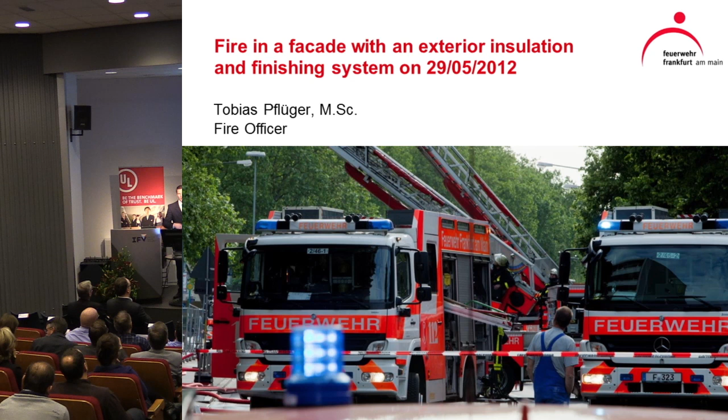My name is Tobias Pflüger. I'm a member of the fire service in Frankfurt. I started my studies 10 years ago in Magdeburg. After my studies, I started in a training program that is usual in Germany when you become a firefighter, a 2-year training program. After that, I became a firefighter in April 2012, 2 months before the incident I'm talking about today.

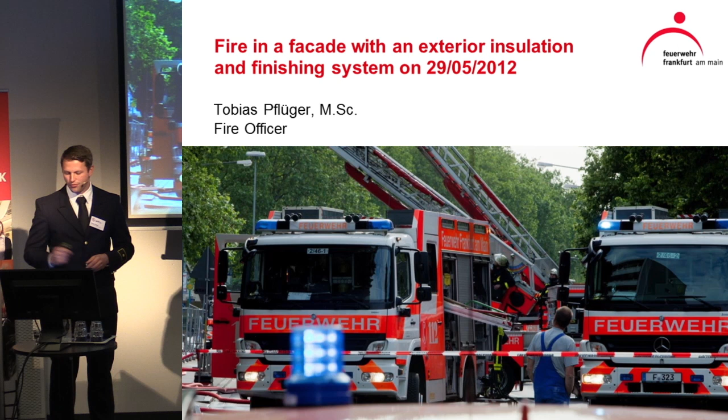My normal job is on a research project from the German government, where we discuss how fast the fire service should be on scene to rescue people. So I'm also a researcher in the fire service.

So at first I would like to give you some information about the structure of Frankfurt and the Frankfurt Fire and Rescue Service, so you have an overview of what the fire service is about. Then an overview of the incident scene and the course of operations, the prevailing conditions, and what we found out, what led us to a situation that is quite unusual for the fire service in Frankfurt, and I guess nowhere in the world. Then I would like to tell you what our next steps had been and the kind of conclusion we now have. So let's start with Frankfurt.

Frankfurt is very famous in Germany for the skyline of the city. We have a lot of skyscrapers and high-rises in the city, more than 100 high-rises above 100 meters. This is one of the most important parts of the fire prevention work in Frankfurt. And we normally have no such big incidents in these buildings.

But we also have a very big transport topic in the fire service. We have an airport, one of the biggest in Europe, and 2 of the most frequented highways in Germany, also within the city borders. Therefore, we have around 1,600 operational staff, meaning firefighters, 800 professionals and 800 volunteer firefighters. And we have 147 firefighters on duty every day, 24/7.

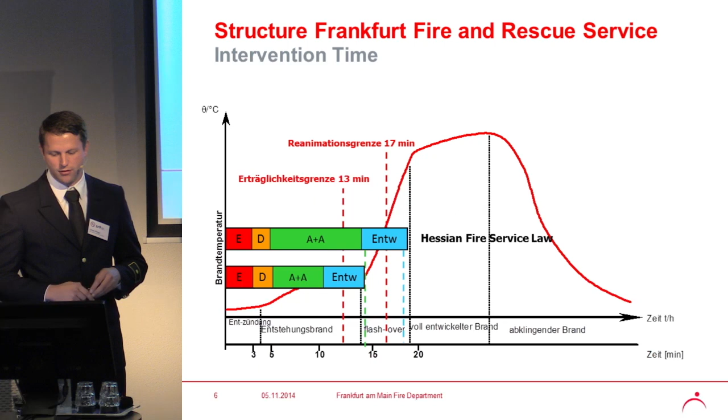This is a Frankfurt resolution. So we are one of the fastest arriving fire services in Germany, and one of the incident scenes we had to arrive at very quickly, finding out that it's not possible to deal with, is the property in the Adickes-Allee in Frankfurt. The Adickes-Allee is one of the main roads out of the city to the west of Frankfurt.

So there's a lot of traffic, especially during rush hour. It's leading also outside the city and also inside the city. The building is a 6-floor former office building, and it was renovated to become student flats.

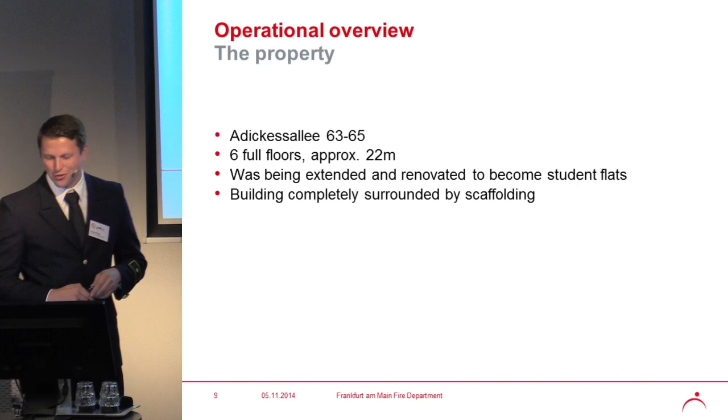We have really big problems with flats in Frankfurt, so we don't have too many of them. So a lot of bankers live in student flats, so it's a high-class student flat building. You pay 700 euros for 20 square meters. That's quite a lot in Frankfurt.

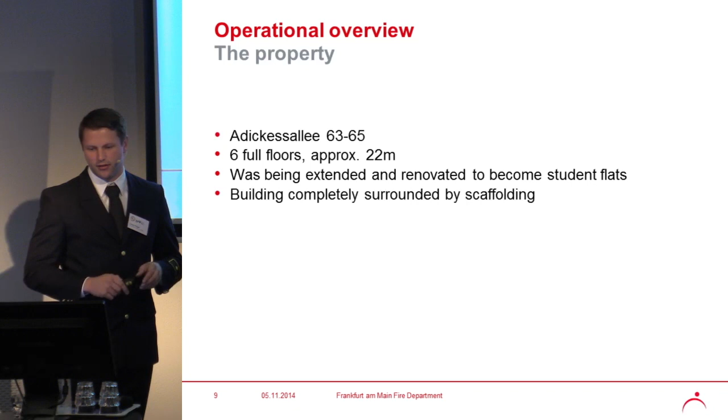And when we arrived on scene, the building was completely surrounded by scaffolding. That was a very important fact in this incident. So I will give you a short idea of where we are in Frankfurt.

Another important, positive fact about this incident is that the Hessian Broadcasting Corporation is also located 150 meters away from the incident scene. I'll tell you later why that's such an important thing for this incident.

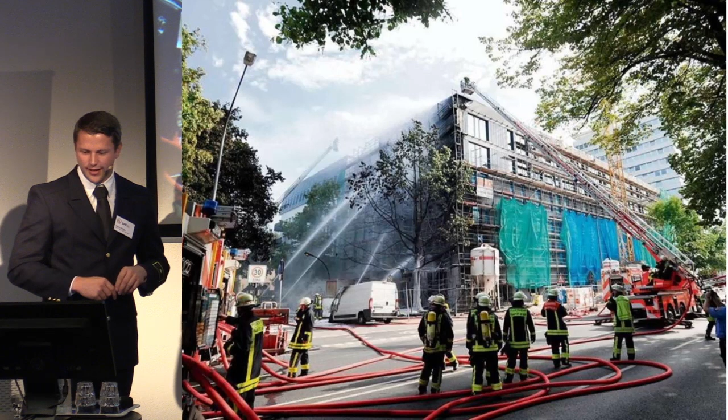So that is what it looks like on the scene. There's one sheet missing, damned.

I told you I had been 2 months in the fire service at that day. It was the end of May, one of the first really warm days of the year. I have to tell you I hadn't been there because at that time I had prepared a barbecue for some fire officers who started with me at the Frankfurt Fire Service. All of them were on my balcony having a party, and we looked to the other side of Frankfurt and enjoyed the skyline instead of enjoying a big smoke plume above the city.

The incident happened around 5 o'clock in the afternoon, and it was a really big incident by our standards, because we had 2 incident commanders of level C, 1 incident commander B, and the citywide tour commander, the A unit. Also our boss, the head of the fire department, was on scene because there was a dramatically increasing or fast fire spread in this scene. It was absolutely clear that this would lead to questions after the incident.

And we had the luck that it was 5 o'clock, so at the building site they were still working, and the site engineer was always there too, which is very important to get information about the building.

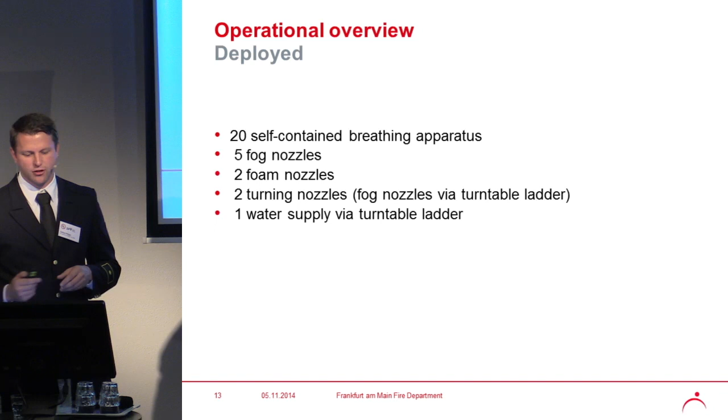So let's go to the course of operation. At 5 minutes after 5, we had the first calls in our emergency dispatch center telling us about a 5-meter high flame on a building site or construction site.

This was reported by a police officer directly across the street who had a view on the scene the whole time. After the incident, we had to talk to the engineer of the building site, who was one of the first to see the fire when it was knee-high, and then went to the back of the building to try to find a fire extinguisher.

By the time he got back, the fire had reached a height of 5 meters, so it probably started maybe 2 to 3 minutes earlier. We don't know that exactly, which is why in the presentation we only show the call that reported 5-meter high flames.

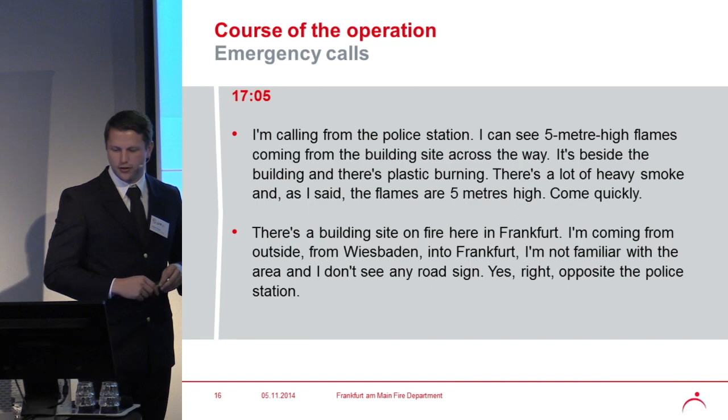That was the moment our dispatch center went crazy, because we received more than 60 emergency calls within a few minutes.

The next call came at 6 minutes after 5, also reporting heavy smoke and people running out of the scaffolding, a very dramatic scene as described on the phone to our dispatchers.

We also received a phone call from Wiesbaden, which is around 40 to 50 kilometers away from Frankfurt. They saw the smoke above Frankfurt and asked if everything was okay, because the Wiesbaden dispatch center had received a call on the emergency line and the colleagues there thought, if there's such a big fire we would have recognized it. But at that moment we still had calls coming in from Frankfurt, and not even a single fire service person was on scene yet.

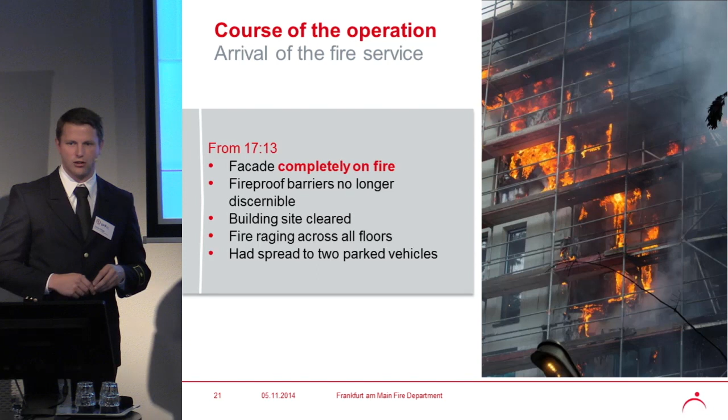This is what our fire chief in Frankfurt called - it looked like war, because all these containers had burned. You see 1 car, but there had been 2 cars completely burned.

This is the sidewalk where the fire had been. We had spalling concrete there, and really, really much heat had been produced - so much that the trees where the photographer is standing under also burned.

We were very lucky that there's a green stripe between two streets next to the building, so the next buildings were more than 20 meters away. If it were like normal in Frankfurt, with the next building directly on the other side of the street, we may have had a fire also in these buildings.

So this is approximately 17 minutes after the fire starts, in our opinion.

So 40 minutes later, we had the 'fire under control' sign, which is the signal to our dispatch center that this is a cold case. That means we don't need any more engines or additional staff.

And now we started the extinguishing work on the facade parts that we don't reach from the outside. So we worked with 3 ladders at that time to open the hard cover of the exterior finishing system and try to extinguish the rest of the polystyrene facade.

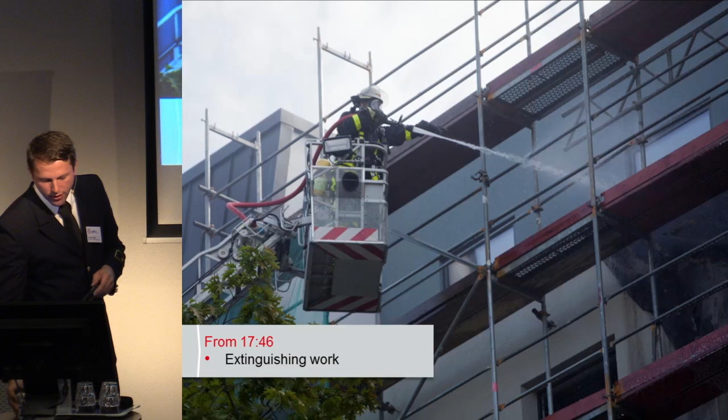What you see here is that we opened the facade on the penthouse level of this building, and you see that there is no polystyrene left. The hardcover was closed like this, but the polystyrene underneath the armoring was completely melted down.

What you see here is the glue which fixed the polystyrene facade. The melted polystyrene looks like glue, melted down to here, and we had a thick, raw oil-like mass that could have burned, but it didn't ignite because the armoring was still in function. The opening was forced by the fire service, so the polystyrene couldn't ignite.

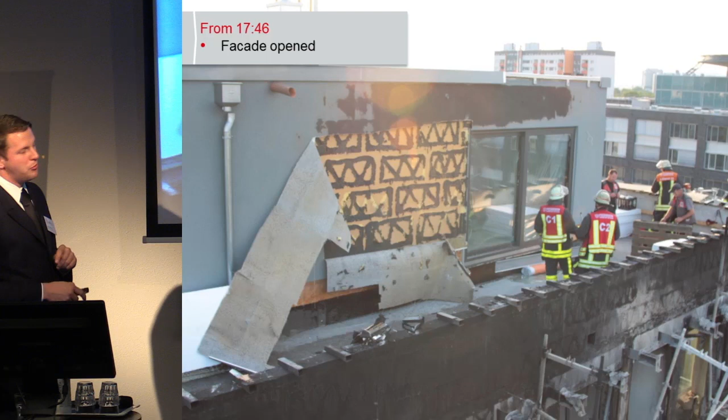What you also see is what was really a good point at this time of the building site - they had prepared for balconies on the front of the building. So when the scaffolding started to move downwards, it hung up on these beams, so the scaffold didn't fall on the street onto our firefighters.

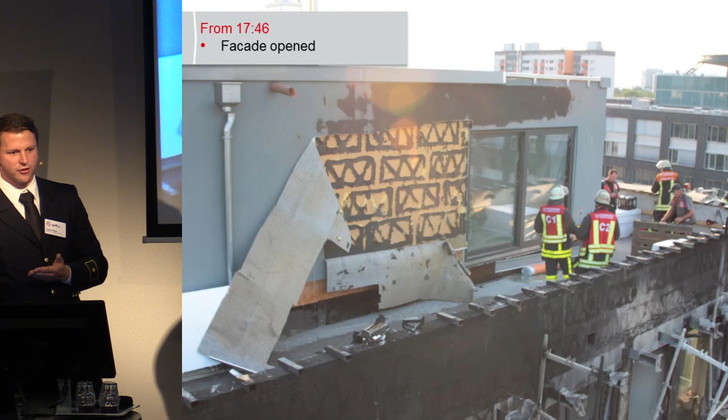You will see some pictures. I guess it's the next one. No.

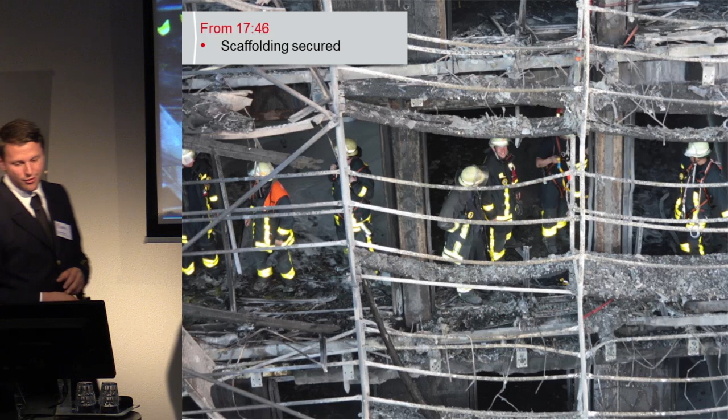This is scaffolding. It looked very unstable, and we had to secure it. This was also a task which took us quite a long time, I have to say.

At 6 minutes after 8 o'clock, 3 hours after the fire started, we had the fire extinguished sign, which means everyone can go home. So not too much time at this point.

What I would like to tell you about this incident is that the building was still in a construction period, and only this part of the facade to the side street had been really completed. Other parts hadn't been completely finished. So you can see here the gray mass. This is the polystyrene facade, and only in the upper parts there's the hardcover or the armoring.

What we also have to say now, or what we found out, is that much of the burning polystyrene in front of the building was from stored polystyrene in front of the building. So it's not only the polystyrene which melted down the wall, it's also polystyrene which was in front of the building.

We had been very lucky because the building wasn't in use yet. The rooms had been completely empty. They planned to start the interior work the next week, the week after the incident, and there was nothing that could burn in the rooms of this flat building.

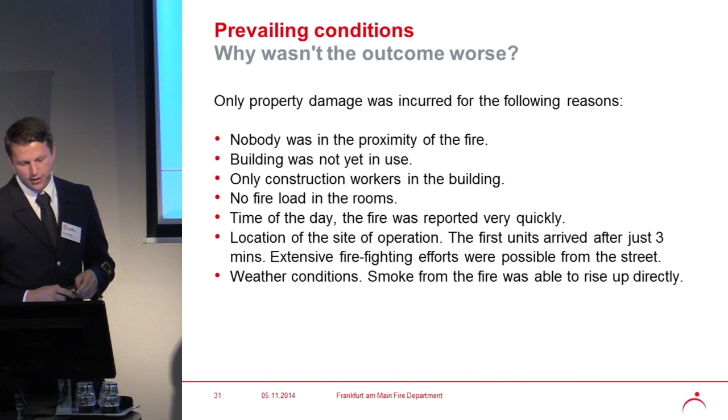We had quite good weather conditions. I told you about the beginning of summer, and the smoke could just rise up. So we didn't have a problem that other buildings had to be evacuated, or other work caused by smoke damage for us. So what we found out...

In Germany, we have a lot of buildings that are insulated with polystyrene. It's the most common building material used, and we have thicknesses from 10 centimeters to 40 centimeters. It's normal standard, more above 30 centimeters right now.

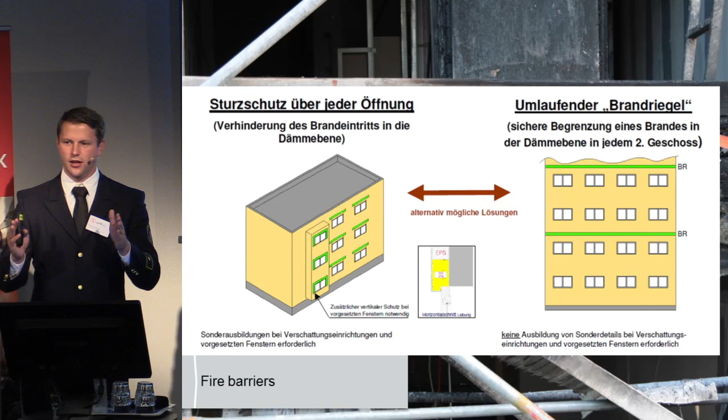It's also allowed to put the fire barrier above every window, but on a construction site, you never see this option. You always find this style, because it's much easier to do on the construction site. So at this time, we had the non-flammable fire barrier, which had a height of 10 centimeters. In this building, we had 32 centimeter thick polystyrene and a 10 centimeter high fire barrier. And that is what the fire barrier looks like after the fire.

The manufacturers told us that we pulled down the fire barrier after the fire was extinguished, but an engineer found out that it was thrown away by the falling EIFS ring, which means that the ring was burning above the fire barrier and also under the fire barrier. That is what an engineer found out.

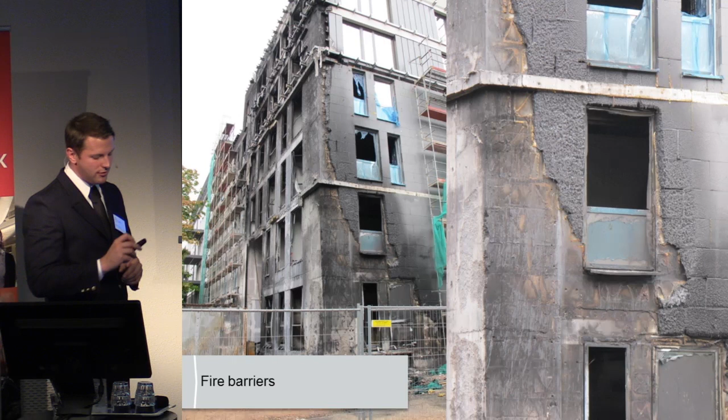What you can also see is that on this side, the armoring, or the facade, was completed. The full armoring was on top of the polystyrene, and the fire barrier had been finished, as you see here. This part of the work was done. On the side of the Adickes-Allee, the lower parts of the building hadn't been finished. They didn't have the armoring.

What you see here is like an inverse fire, where the material melted more in the lower parts than in the upper parts. That's completely different than you'd expect in a normal fire. You'd expect more like this form. But we think it's a problem of the ground fire that was also in this area, and the wind came from this direction and blew away the smoke from the building. That's our opinion why this happened in this incident, not like you expected.

But you see another point: the unfinished, not-armored insulation system didn't burn the complete height, but the finished system burned over the whole building height. So there must be a problem when the armoring is on the polystyrene.

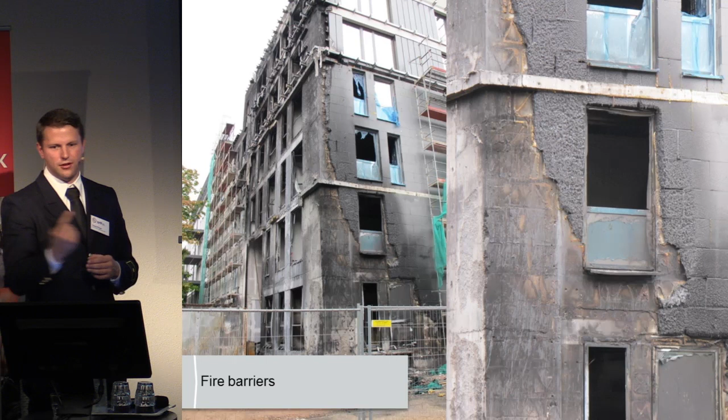When you build a fire with a wood piece, you dig a hole into it so that the fire can heat all the surrounding material. This is what happened here. The hard cover and the armoring was on one side, the fire was in between, it melted the polystyrene, and the melting polystyrene attached to the armoring and also to the wall. So it had a kind of chimney effect, forcing the fire more to the upper parts. This is what we saw on the incident scene.

You mean that the facade fell down unburned, and you found remains on the street, or did it burn well? Remains of the polystyrene, or the parts? The question is if we found remains of the facade on the street.

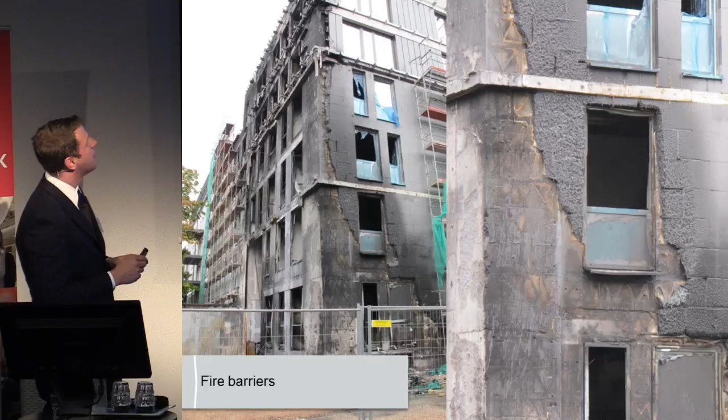We found it not on the street but on the scaffolding, because it's an uncombustible, mineral material, and also a plastic wrap which is attached to the polystyrene surface, so that the parts could attach to the polystyrene. What we also know, though you can't see it well in this picture, is that when you go closer you see that the fire barrier was glued to the wall, and this glue wasn't heat resistant.

Yeah, it's not necessary. Okay.

From the fire service point of view, we recognized that there may be new incidents we can't handle. We saw on the incident scene that we couldn't handle the fire, and afterward we got the whole timeline, which is very uncommon for a fire. I guess also in the Netherlands you have a reporting timeline from the moment of ignition to the first arrival of the engine. We knew it was a very short period of time. We found that even a very powerful fire service like Frankfurt's, with 150 firefighters on duty 24/7, which is quite a lot in Germany, couldn't handle this fire. We didn't have time to react because the fire spread at such an enormous speed that we couldn't deal with the problem.

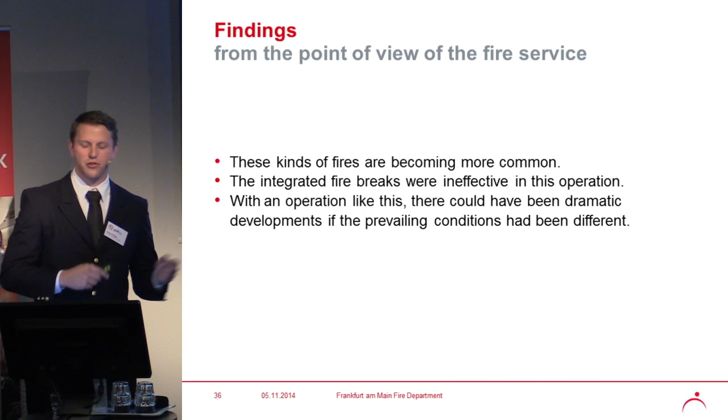So what is the first thing you would do? I guess you ask other fire services if they had the problem before. We did the same in our next steps. We asked every relevant fire service organization, volunteer fire services, professional fire services, and plant fire service organizations, if they had incidents relating to polystyrene facade systems, and what their opinion was about that.

We asked them to send us every incident with a report and pictures, and we collected them, because we had also had discussions with the manufacturers. They told us it isn't a problem of the system. The system is tested, it's evaluated, and it's certificated. So that couldn't be a problem of the manufacturers or the system.

Then we also had discussions with politicians. In Germany, the goal of reducing carbon dioxide and energy saving rules are a very high goal of the German political parties, of every one of them. So it's very uncommon to tell them that there might be problems by insulating houses.

Even the most common system in Germany, where we have millions of square meters installed in buildings each year, seems to have problems. So we discussed the problem also with technical bodies, such as the German Institute for Building Technologies, which is responsible for certifying and preparing the testing of building materials and systems.

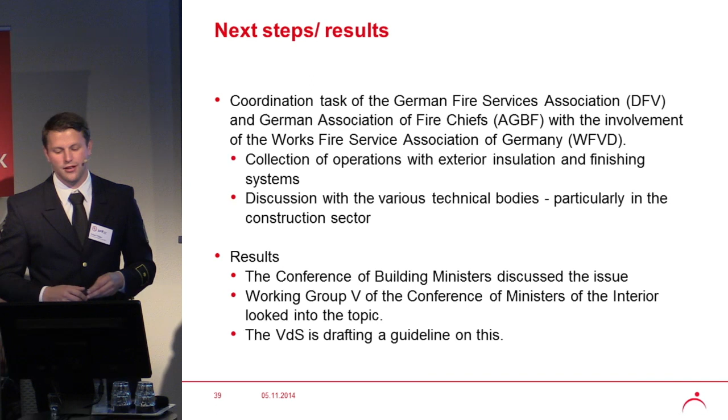And also there are technical problems on the construction side. At this point we discussed with the building minister conference and shared all the information with them. And I forgot one fact: at this point of the discussion, we as fire service in Frankfurt hadn't been involved anymore in the process, because the leading fire service responsible for fire prevention in this case is, up to now, Munich. We gave all our information to the officer in Munich, and he transported it into the building minister conference and other working groups in the political area. So we hadn't been involved anymore, but we are still kind of experts, because we had seen a dramatic incident, so they wouldn't let us go without our knowledge.

They contacted us. The question is whether the distributors or manufacturers of the systems contacted us, or we contacted them. They contacted us first, because the day after the incident there was a big news magazine segment on television, and there was one sentence my boss said. It was very rough, I don't know how to explain it, but very rough against the industry. And then they sent us lawyers and letters saying we should be more quiet, because it's their tested, certificated systems and all that stuff. So it was very good that the fire service in Munich took over the next part, dealing with the political parties and relevant organizations and such.

In March 2013, nearly one year after this incident, the Hessian Minister for Economics, Transport and Regional Development—it's now another department with another name, it's changing really often—this minister is responsible for building technologies in Hessen, the state of Hessen. He was at that time the chairman of the German Building Minister Conference, and he gave the first press release where political parties accepted that there is an issue or a problem with polystyrene facades. As you can see here, I hope it's also in this text, there should be a working group again to discuss this problem and find out what the real issue is.

One of the most important points is that rubbish containers might also be a problem. I told you that all the time, when the systems were tested years ago to get their certification, they always thought about a fire starting inside the building and spreading, with flames coming out of the window and igniting the facade. But in our case, the fire started in front of the building, and in our collection of 100 incidents, we had many cases with a fire starting in front of the building. Especially the heavy incidents had started outside of the building.

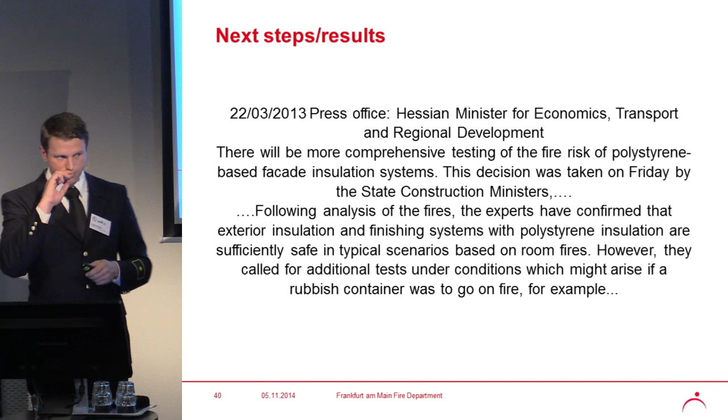The building was surrounded with workers' platforms, covered for wind and rain with plastic covers. Had this material influenced the fire? The question is whether plastic materials that protect scaffolding from rain and wind were involved in the fire. Yes, they were involved, but we don't know how dramatically. But we had other incidents where the building wasn't scaffolded and had still been in use for some years. So other buildings had the problem even when they weren't scaffolded.

The speed of spreading the fire could be influenced. That's true. This was a real incident, not a scientific research project.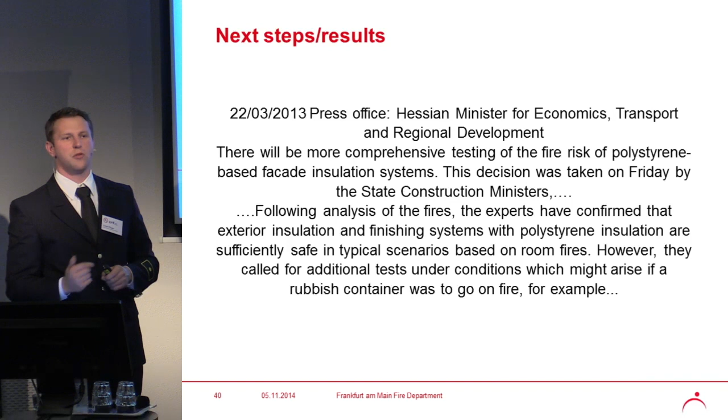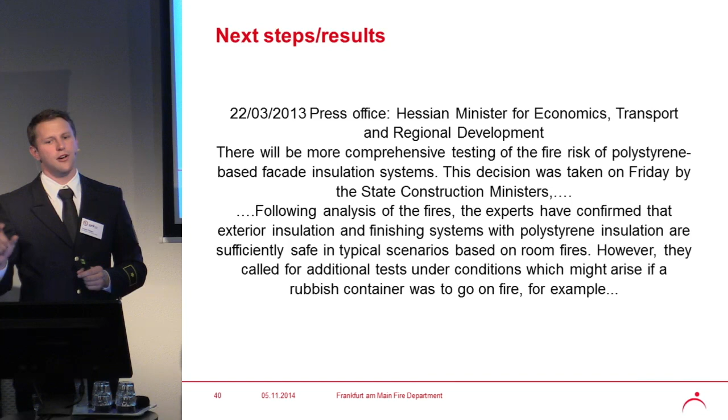The producers told us at the beginning that one of the reasons for the enormous fire spread was the scaffolding, and that the wooden beam on the ground of the scaffolding also caused the fire. But on our pictures we saw that all of the wooden beams had still been in function. We had pictures where the workers who deconstructed this melted scaffolding walked on them, so they couldn't have burned too much. They still have a thickness where they can bear a person. So the fire was so fast that the beam wasn't burned down too much.

We don't know it, I have to be honest, but we had other cases where no scaffolding had been involved, and there was also enormously fast fire spread.

So now we invent a working group, supported by an expert group. Every responsible party of the producing and building side, the fire service, and the regulation organizations had been involved in this working group and also in the expert group.

They first had to define the test conditions. What is the problem? Now we have again the rubbish bin. It was clear that the new test will have a fire which starts in front of a building. And we found out that the problem is a big fuel load in front of the building. In our case, it had been stored polystyrene in front of the building.

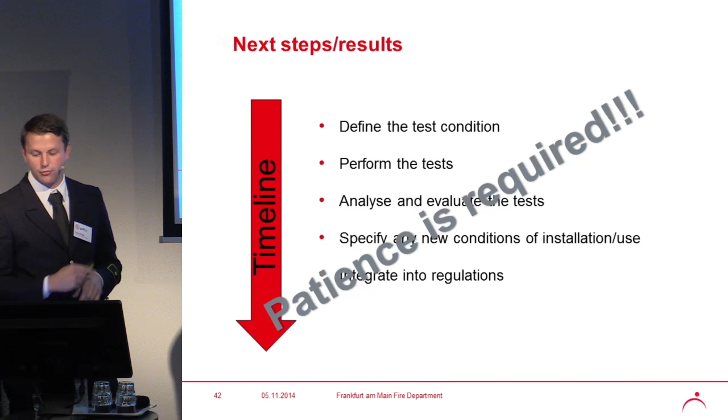Three of the tests had been performed. And the analysis and evaluation of this test had also... one second, I have a new sheet. So this is what the actual status is today.

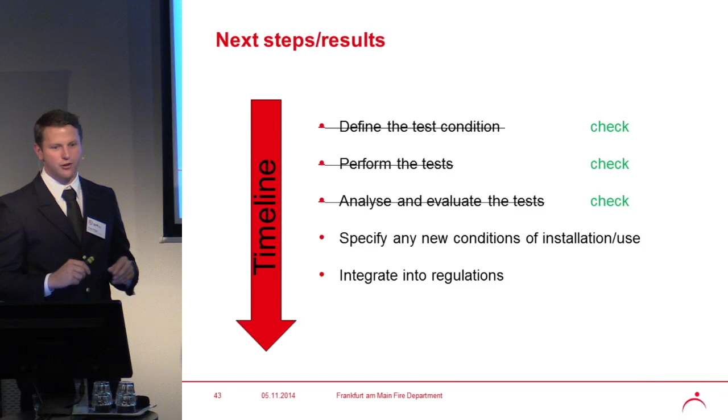And what I'm also very proud to tell you is that this week we will have a press release from the German Institute for Building Technology, which will say that there are new ideas for how the polystyrene system should attach to walls. So we now have a conclusion in this process.

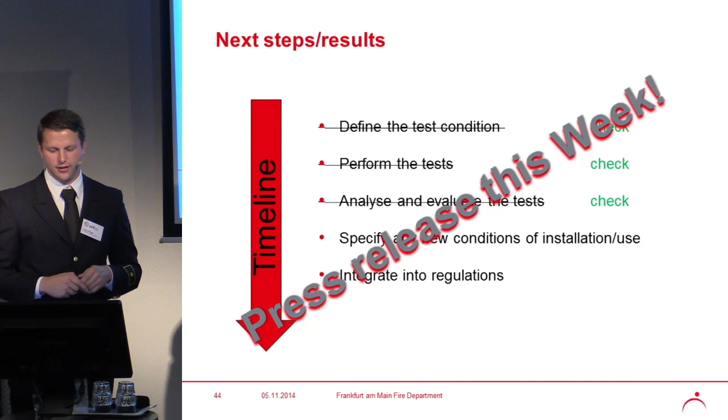I can't show you this press release because it's announced somewhere this week. I hope that it will be today or yesterday, but in the break I had a look at the website of the institute and they hadn't released it yet. So I can tell you what other nations are doing right now. Maybe it's also an idea for Germany.

In Switzerland and Austria, they have these fire barriers after every floor, so every floor is a fire compartment on its own. There's also a fire barrier at the very lowest part of the system, also 10 centimeters. The lowest part depends on how the building or the insulation system is built, so it's just the lowest part. The insulation system has to start with a non-flammable material in Austria. So if the fire is starting in the basement and basement windows are broken, then the flames come underneath to the lowest part of the system, and this fire barrier should stop these flames.

There's also, in other nations, a discussion about how to attach these fire barriers. Everywhere it's now allowed to glue this system, but there may be other connection systems available that are more heat resistant. But there's a very serious issue with the thermal behavior.

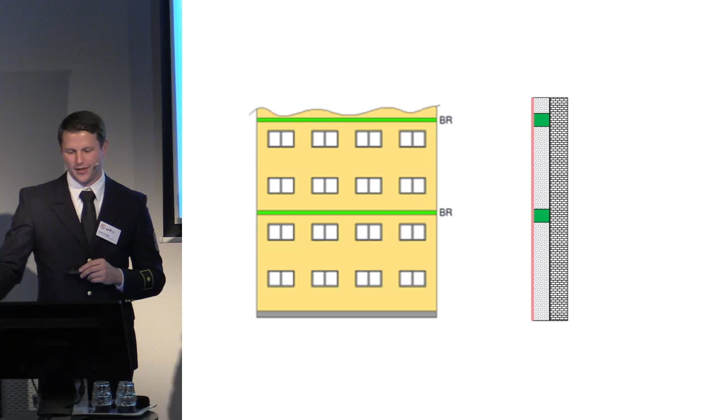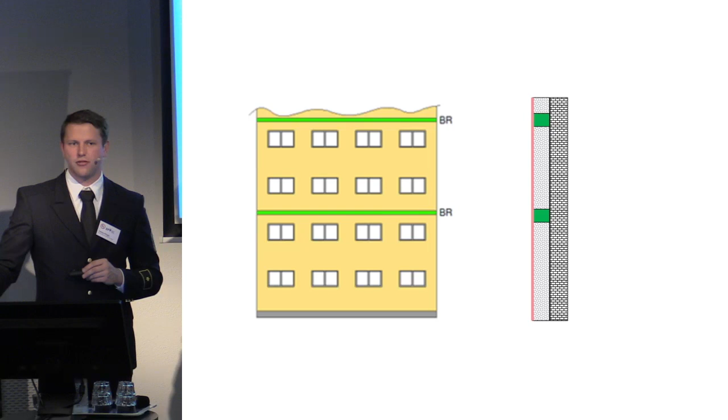If you use metal screws on the system, even under the armor ring, you will see them after 2 or 3 years on the outside of the wall, because it's a different thermal behavior, and that will lead to... what is it in Dutch?

You will see them through the wall. So that is one of the problems we're dealing with now, but this is the kind of solution we expect. And what we know from other fires is what happened on our construction site.

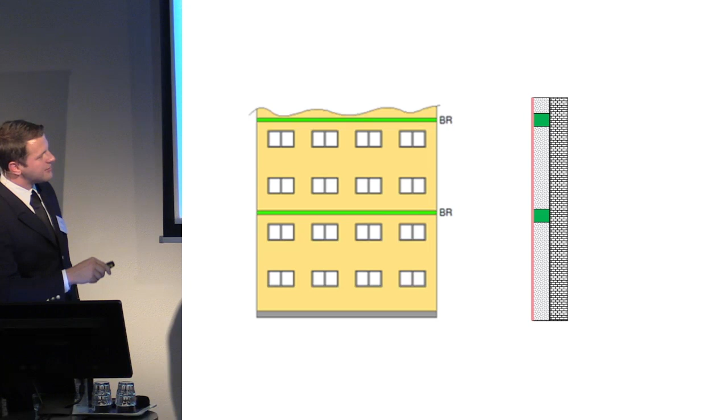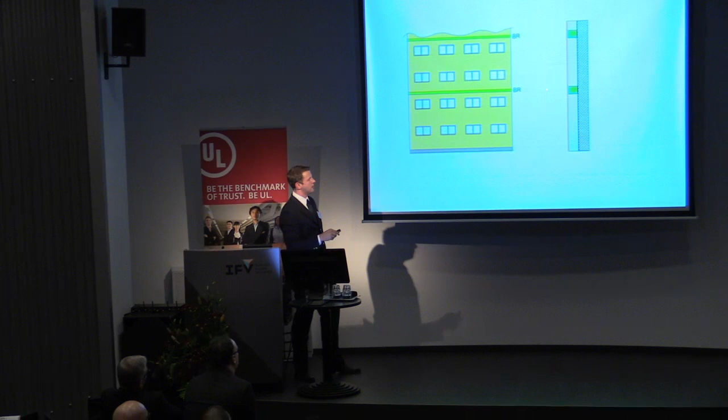The fire is in front of the building, let's say here, and the heat or radiation is heating up the armoring front. Then the polystyrene starts to melt and flows down within the space between the armoring and the wall. You get melted polystyrene like a pool above the fire barrier, and if there's no more polystyrene under this fire barrier, the fire barrier will break down because all the load is now on it, and this will lead to the armoring breaking down.

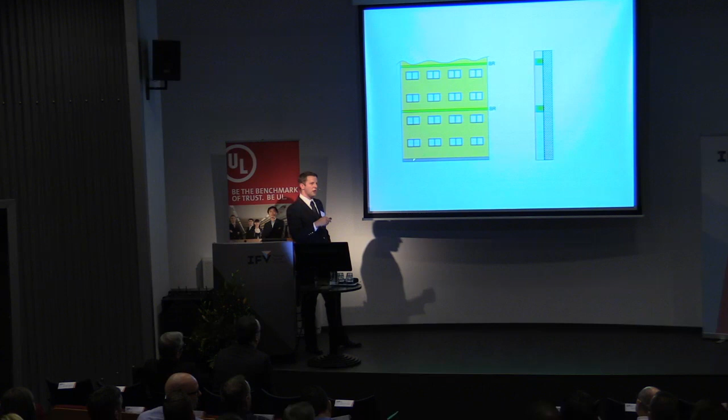So at first we have a kind of convex situation where the armoring is bulging out, and then when the fire barrier is breaking or losing its bearing capacity, the armoring will break and we get air in the space in between, and this creates this wonderful effect.

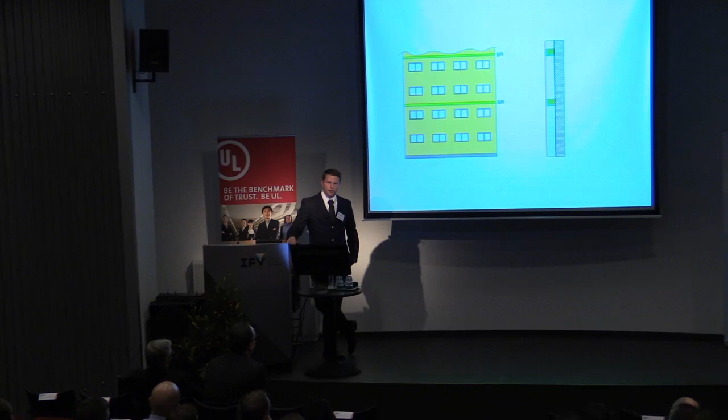What's also a problem, which we didn't know, but the experts told us, is that birds love this kind of wall construction to build nests. So there will maybe be a regulation that people have to repair the facade immediately, especially a polystyrene facade, as soon as they recognize there's some kind of problem with the hard cover or the armoring.

We often have rubbish bins in front of buildings, and when they're opened they make holes into the armoring part of the system, causing damage in the lower parts. These are a major problem - it seems like this is the major problem in most cases in Germany.

Not like we had an open facade on one side, so the fire or air could start from the side into the space between the armoring and the wall. In all of Germany, it seems like the broken parts of this armoring are the most common problem.

So, now you know. Don't tell anyone what I told you. But...